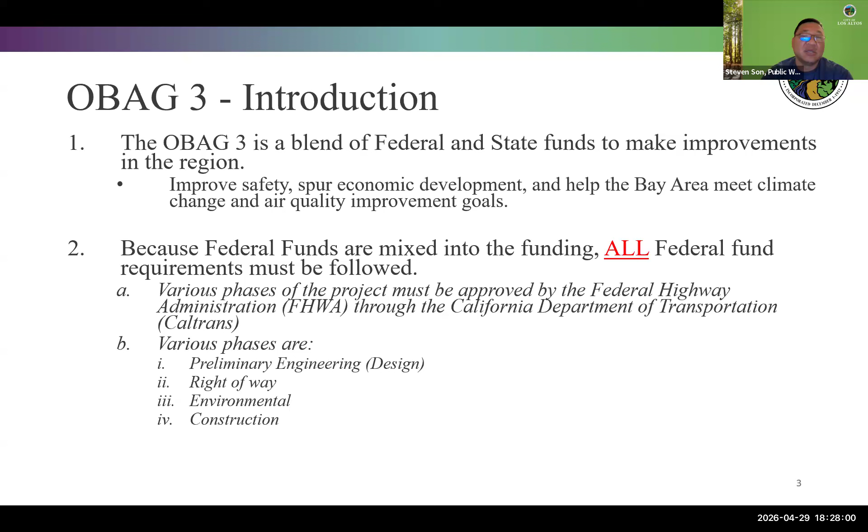After we have gone through this whole process, we're going to be applying for construction. So basically what we're saying is: federal government, we have a design, we have the necessary right of way, we don't see any environmental impacts, so allow us to go through construction.

So we have already received the design authorization to proceed with the design. I've been working with Caltrans to start working on the construction quality assurance plan, which is the QAP, and the QAC program, which is the quality control plan and the assurance plan and control.

Basically, what we do is reassure to the government that we're going to follow all federal requirements for procuring the necessary equipment. We're going to follow all the necessary rules when it comes to the Buy America Act. We're also going to follow the national AASHTO standard for all the testing method and how we procure the equipment.

So in this document, it clearly has to show how we're going to construct it, what standard we're going to follow, how we're going to test the equipment and the materials, and how we're going to ensure that the method we're using is top quality and follows industry standard.

Based on my deep analysis of what the grant application submitted, it appears that it was not exactly what everybody presumed it was going to be. In fact, it appears that there are some issues with how the grant application cost estimate was done, because there were a lot of critical things that were missed as part of the application itself.

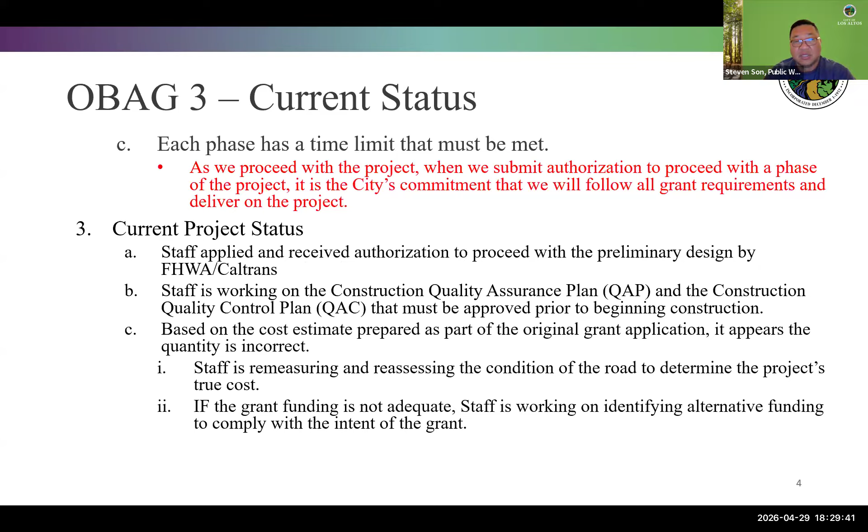Basically, this is the portion where it says we're going to follow all federal guidance. So we are mandated by the Code of Federal Regulation. These are all the do's and don'ts of how we are going to utilize these funds.

So just to give you a general scope of the project, this is an excerpt from the actual application that was submitted. The scope stated that the project will implement complete streets best practices, including protected bicycle ways, better integration between transit and bicycle, enhanced crosswalks, preservation of existing sidewalk, and narrow vehicle lanes.

I pointed out some of the key features that are going to have an impact, and I'll explain things. With respect to the enhanced crosswalk, we have already been doing this for some time now. I don't know if you guys have seen the RRFB installed along San Antonio. We have already been implementing various enhancements on the crosswalk, and we will continue to make those improvements, as well as putting in high visibility crosswalks as part of this project.

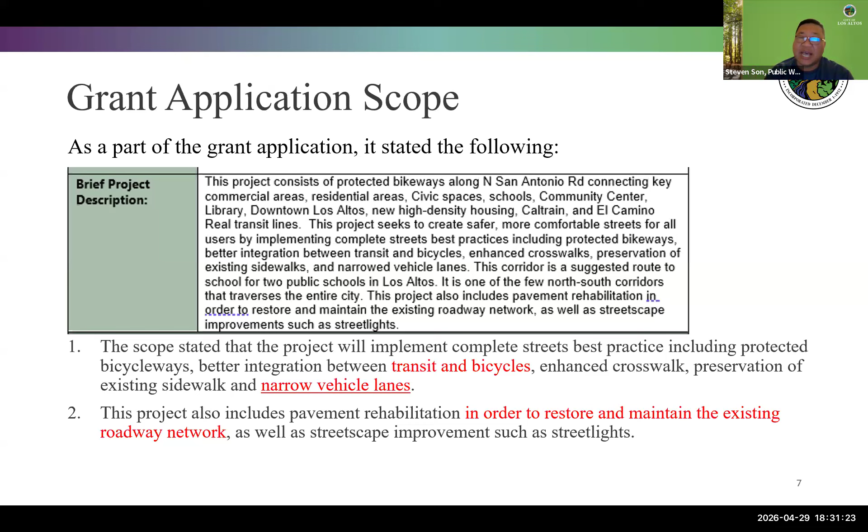It also states in the grant application that we are going to do a pavement rehabilitation to restore the existing road so that it would be a good network for us to make all the necessary improvements. We're also going to improve the streetscape and install streetlights. So this is what was actually submitted in the application. This is the scope of work, and this is where we need to try to meet.

I'm sharing with you the application scope and some of the categories of the grant application it fell under. We're stating that it is a Safe Routes to School infrastructure project, complete street improvements. We're going to mix in streetscape improvements, preserve our local road network, enhance safety, and improve our infrastructure within this area.

And in the narrative itself, we also said that this project rehabilitates pavement along the corridor, which is in need of repair. So we've already acknowledged that there is an issue with the road itself, and we're going to make necessary repairs as part of this grant.

One of the reasons why I'm bringing this issue up now is because it's going to have an impact on how we proceed with this project going forward.

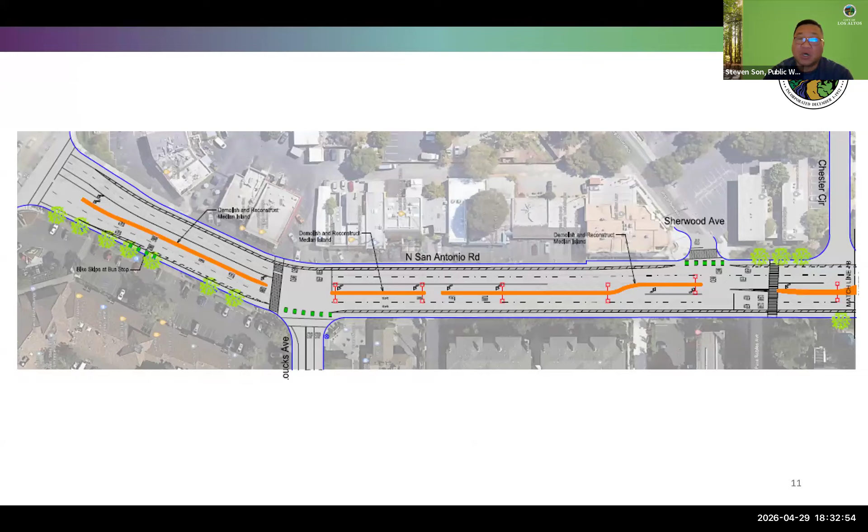The handout that I provided to you guys is the actual layout that has been submitted as part of the application. As you can tell, we're going to install what appears to be a bicycle lane with a 2-foot buffer. We're going to remove and replace the existing median, put in new striping, and add green marking for the bicycle lane. So these are some of the improvements being proposed as part of this grant application.

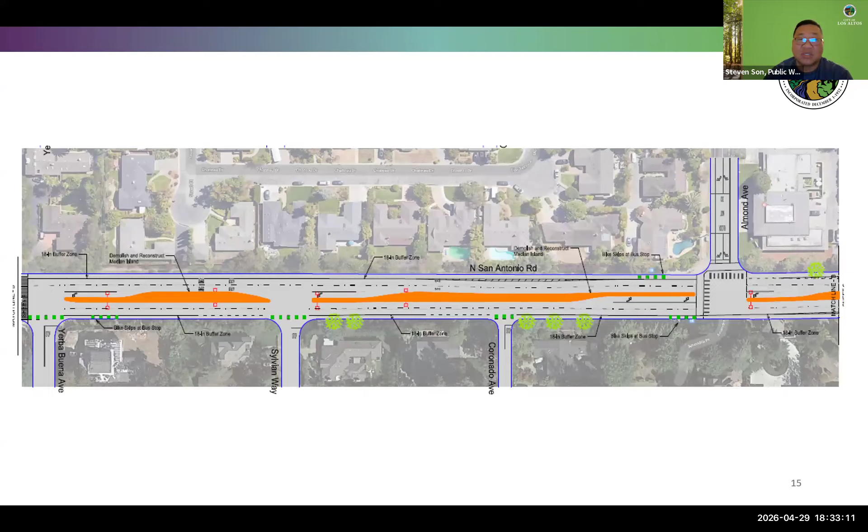We're also going to increase visibility by putting in enhanced crosswalks. So like I stated, we're going to put in the piano keys so that we're bringing more visibility into this project.

Now, one of the reasons why we're going—and this is kind of a critical section for us—is this: on the left is the grant application cost estimate that was done as part of the grant application. On the right was the cost estimate done in anticipation of possible rehabilitation of the road itself.

If you look on the left, you can see that we are proposing to make all the improvements shown on the plan, which is the remove and replace of the median, the striping, but it excludes all the rehabilitation required as part of this project. When this project was conceived, they did look at methods to rehab the road. They anticipated that they might just micro-resurface the road and dig out the existing asphalt section. That's the reason why on the right-hand side you see a significant cost increase of up to 12.79 million compared to the cost estimate on the left side, which excludes a lot of the rehabilitation.

That is part of what I already mentioned in our grant application that we're going to be doing. The other reason why this is very critical is it gives us a kind of roadmap—what was the thought process at that time, what was the staff thinking of doing to this road itself.

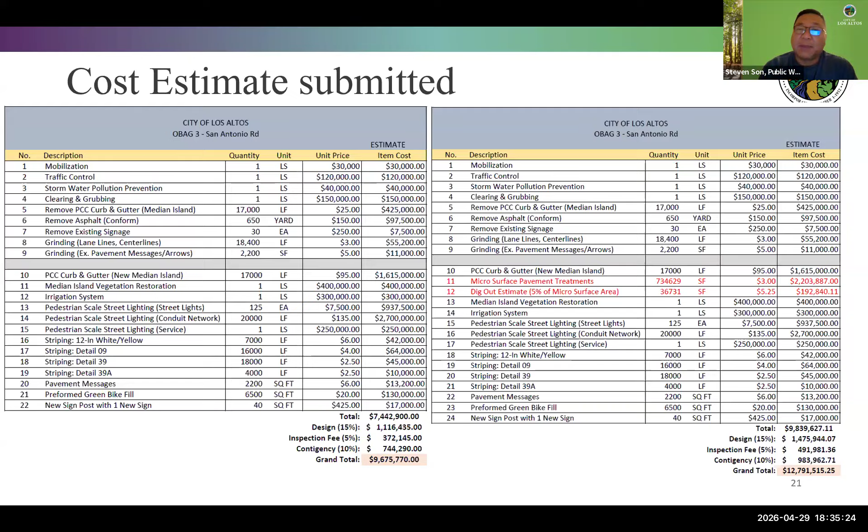So for us, I look at this and say, okay, I can glean the fact that we're going to remove and replace the median, remove and replace some of the asphalt—which is only 650 yards, not really that much—remove and replace signage, and grind out some of the travel lanes because we have to remove the existing striping. So it gives me a general idea of what the intent of the grant applicant was at that point in time.

Based on what was awarded from the MTC, there are some issues with what has been submitted. The cost estimate does not address the road rehabilitation. It was totally not included in the whole quantity estimate. Based on just spot checking some of the quantities shown, it doesn't seem correct.

There is no sidewalk repair that needs to be done along San Antonio. If you guys walk along San Antonio, we have a lot of really tall trees that have started lifting the sidewalk itself. And not to mention, it does not take into account any physical separators in the cost estimate. So it's kind of hard to tell exactly what the thought process was, but based on the drawing itself, it appears there was some sort of separation they were proposing to do, and I think it might have been striping.

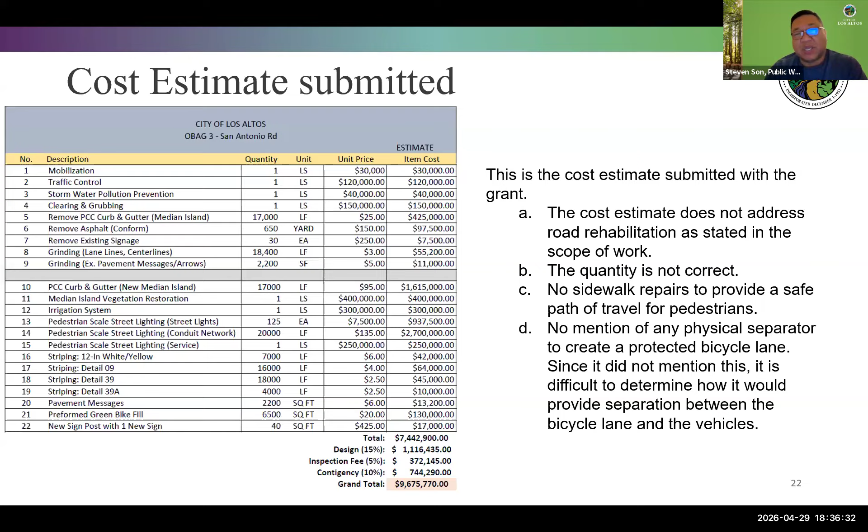As I've stated before, in our annual streets program, microsurfacing is basically applied when a road is weathered and has a PCI of around 70, where the structural integrity of the road itself is still in relatively good condition. We just want to preserve what we have and continue with preserving the road, doing some maintenance so we could prolong the life of the road.

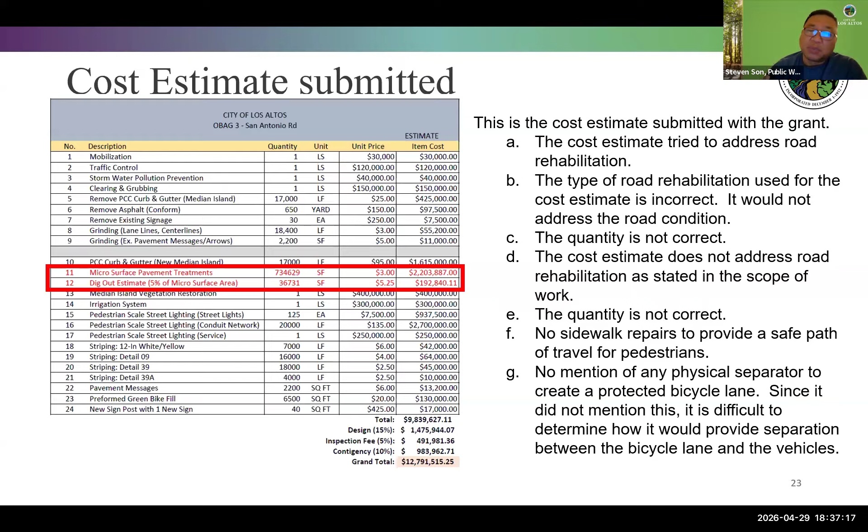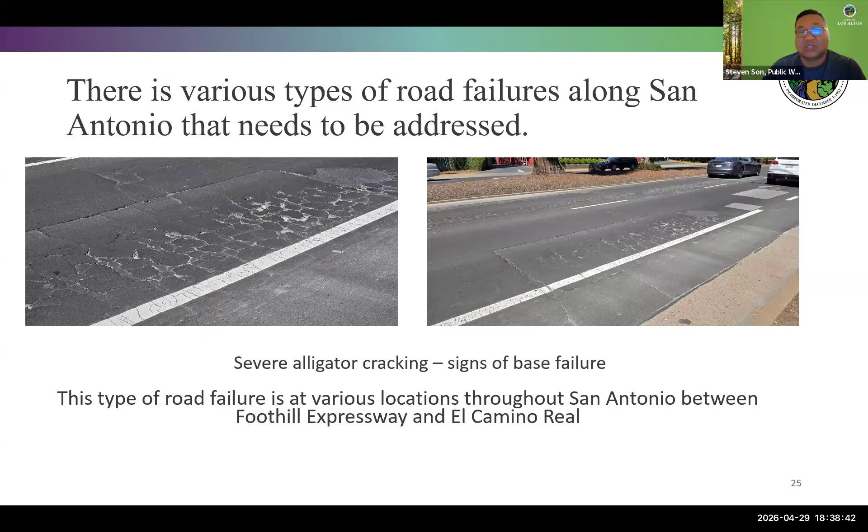You can kind of see the results of the old microsurfacing that was done on San Antonio. The discoloration you see right here is because the old microsurfacing has worn off, just from traffic. Microsurfacing is only good for about 7 to 10 years, and we have to reapply it, assuming we don't have cracking like you see here.

You're also in a situation where microsurfacing on this type of crack, even if we were to do a crack seal, is not going to allow this road to be prolonged for the life we really need to install these bike lanes. So unless we address this, when the road deteriorates even more, we would have to remove any improvements we make on this road to have this bike separation.

So this has to be addressed now, before we go ahead and apply the $9 million, to avoid having to spend another $9 million to put it back in.

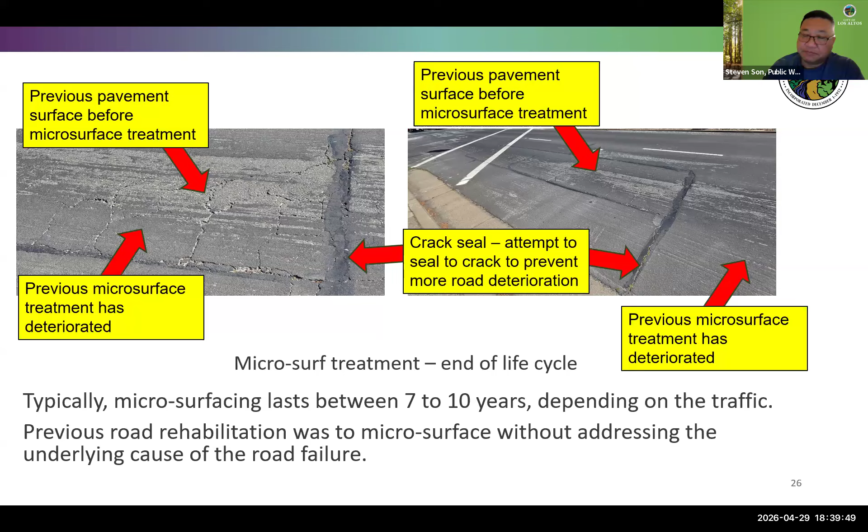San Antonio is also one of our heavier traffic loads roads. Because of that, we're starting to see rutting on the road itself. What is rutting? Basically, rutting is caused because of the speed of the vehicle - when the light changes, they start decelerating. The car is decelerating because of the friction between the tire and the road, and that stops the car. That friction also has an impact on the road itself, where it starts peeling back the asphalt so that you start having an indentation on the road.

You can kind of see that, typically with color variation like you see here. So this is where the wheel well is currently located at. You can kind of see it's starting to crack. As the road starts to rut, water's ponding on it, cars driving on it. As the cracks form, you're causing the road to flex more, water's getting in, and it's slowly causing the cracking to occur.

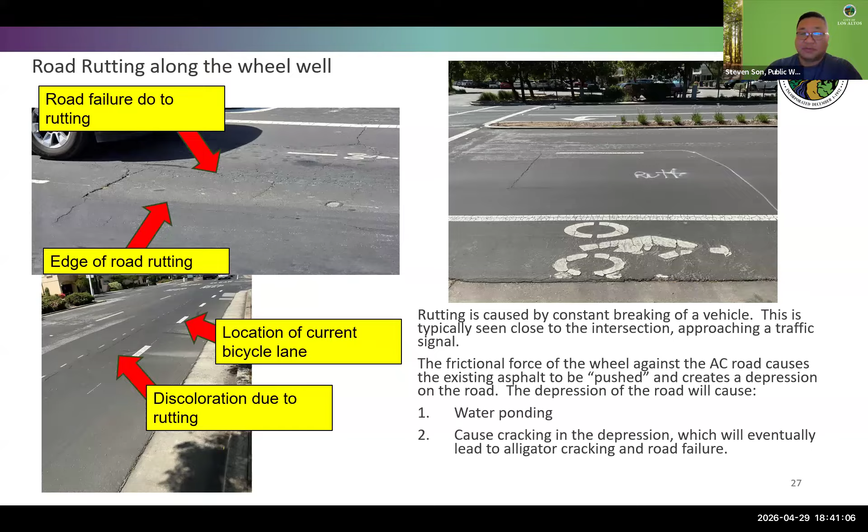Here are some of the other issues going on throughout San Antonio: through the years we have torn up this road for various utility installations. We've adjusted manholes, placed overlay, and you see trench patches where other utilities went ahead and installed their work. Every single time we do a trench patch, you're creating a weak spot where the old asphalt and the new asphalt meet that cannot be sealed. It's basically a hairline fracture that storm water will get into.

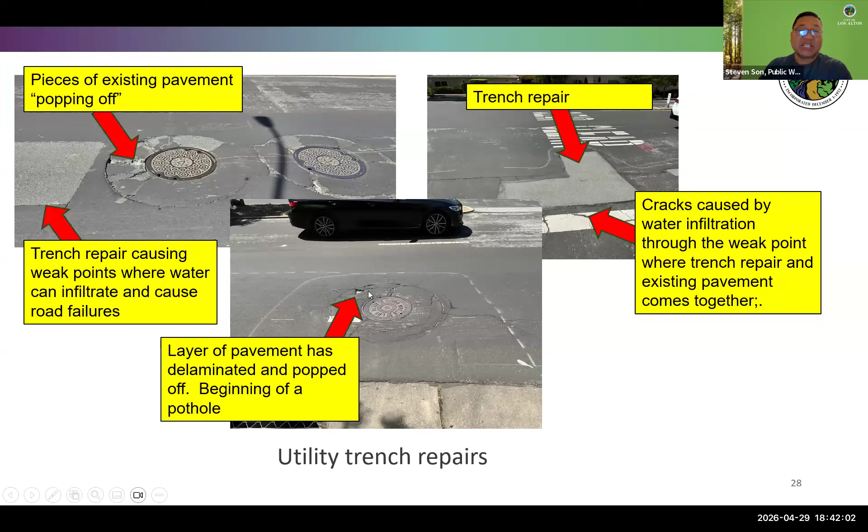And water is hydraulically very difficult to compress. So as water starts getting into those cracks, it propagates the cracks even more, to the point like these right here, where the asphalt is actually popping out - creating the beginning of a pothole.

The other issue along San Antonio is the fact that, like I stated before, the trees and vegetation are very mature in this area. So it's starting to lift the road as well as the sidewalk. This is now slowly becoming a tripping hazard that we've been trying to address by grinding out the lips so it's not a tripping hazard. But those are temporary fixes - we need to go through and really fix it.

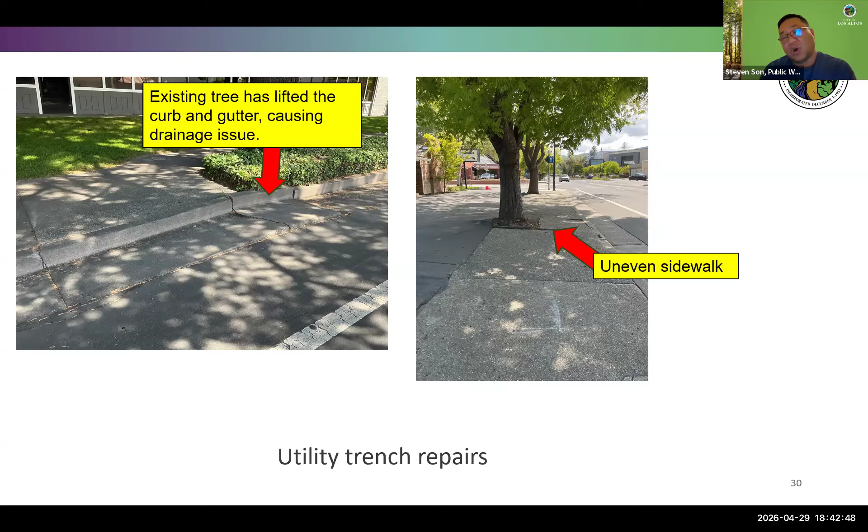Also, the tree roots are lifting the curb and gutter, causing drainage issues at various locations along San Antonio. These are locations where water is basically pooling, you're going to have debris build up, and it just has a cascading effect.

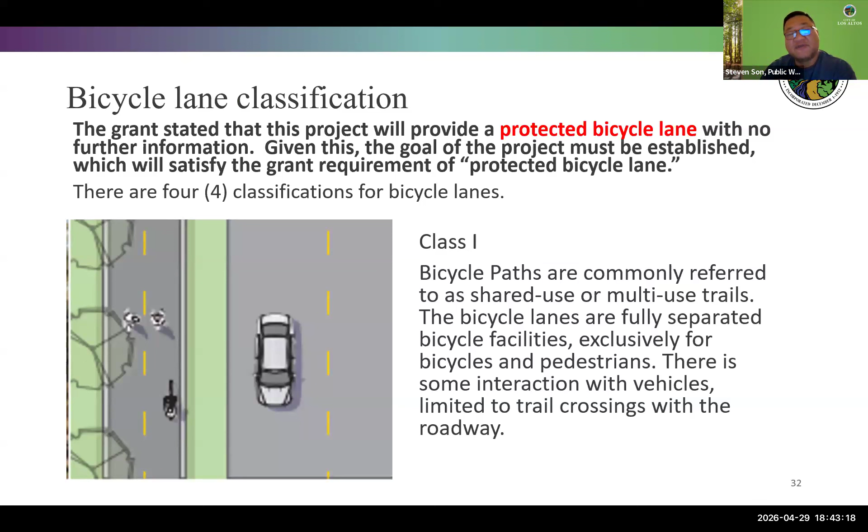Now I just want to briefly talk about the different classes of bicycle lanes identified in the Caltrans manuals. We have Class 1, which is basically a bicycle-pedestrian lane with total separation - both pedestrians and bicyclists use it, with a clear separation from vehicles. A Class 2 is what you would normally see throughout the city right now, where you have a bicycle lane designated into the travel lane with stripes, and we go ahead and show it with green paint, bicycle logos, and things like that.

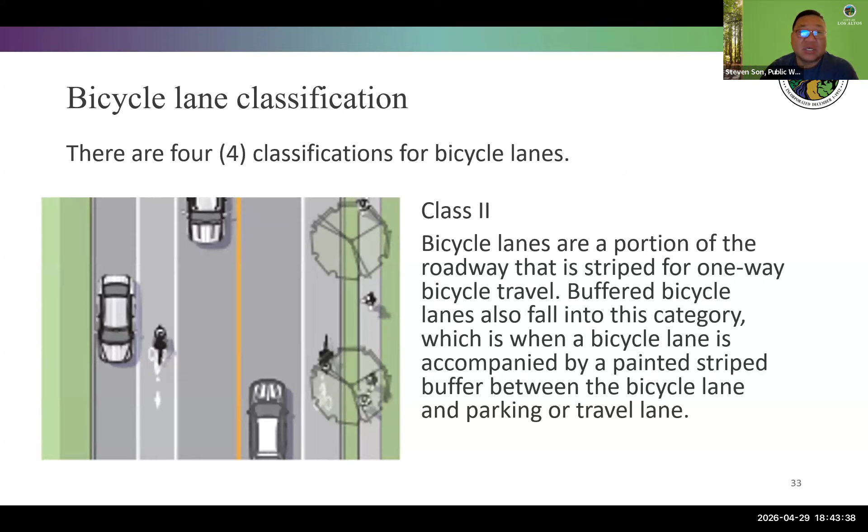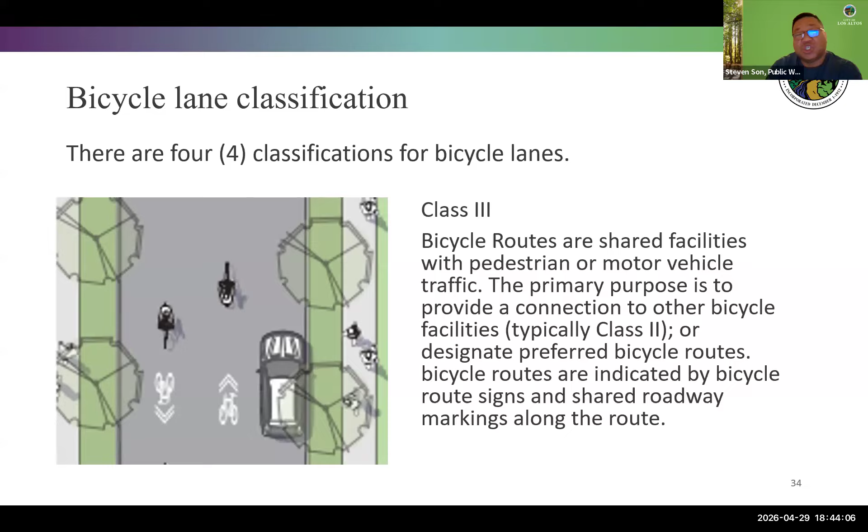There's a Class 3 - this is the one you would call a Sharrow. A classic example that pops out right now is on Portola Road, where right in front of the school you have a Sharrow. This usually allows you to connect a bicycle lane, so you're allowing a short section of road to be shared between cars and bicyclists.

Class 4 is what you would normally see with some sort of a 2-foot barrier that separates the bicyclist from the vehicle. Typically you do not see a pedestrian walking on this, but because we have no sidewalk in the city, you will see some pedestrians on it. This is basically a 2-foot buffer with some sort of barrier in between. You can see some of that along El Monte with the quick curb we just installed, so that it provides a level of protection for bicyclists - so that when they traverse through the area, a vehicle, even if they lose control, will not go through that barrier and hit a bicyclist.

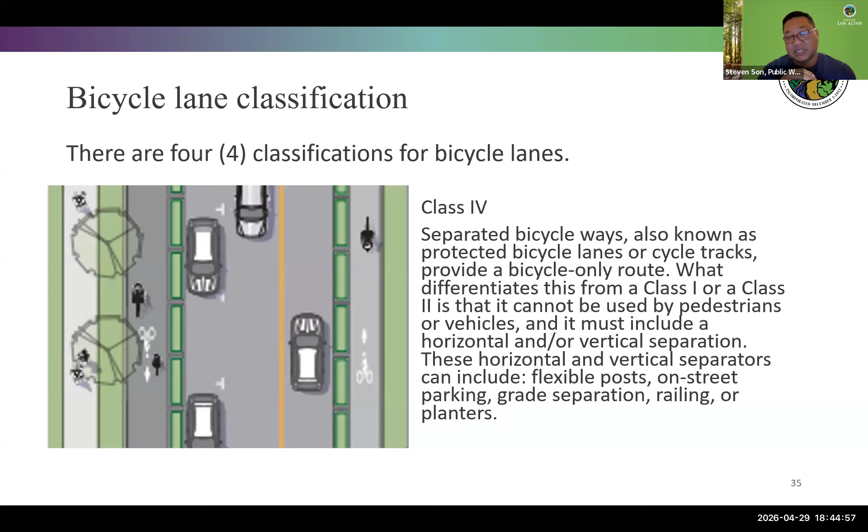Based on what I'm seeing right now on the plans, I could deduce that it is a Class 1 or Class 4, based on the striping where the bicycle lanes are and where they're putting in the green lines. So I'm assuming it's just Class 4. What are some of the challenges of implementing the grant? Class 1 would be very difficult for us to install because we would have to physically create a land barrier separation between the bicycle lane and the vehicle.

So we would possibly be having to move the sidewalk or do something creative to create that separation. Based on what I'm seeing right now on the drawing, I'm assuming it's a class 4 that was being proposed. A class 4 requires a 2-foot buffer with a quick curb or something like that that actually creates a physical barrier so that a vehicle cannot intrude into a bicycle lane.

The grant itself is saying that we're going to narrow the road. So the existing road is already 11 feet wide. San Antonio is a truck route. For us to reduce it down to 10.5 feet is not going to give us the added benefit to allow us to go ahead and put in the 2-foot bicycle lane.

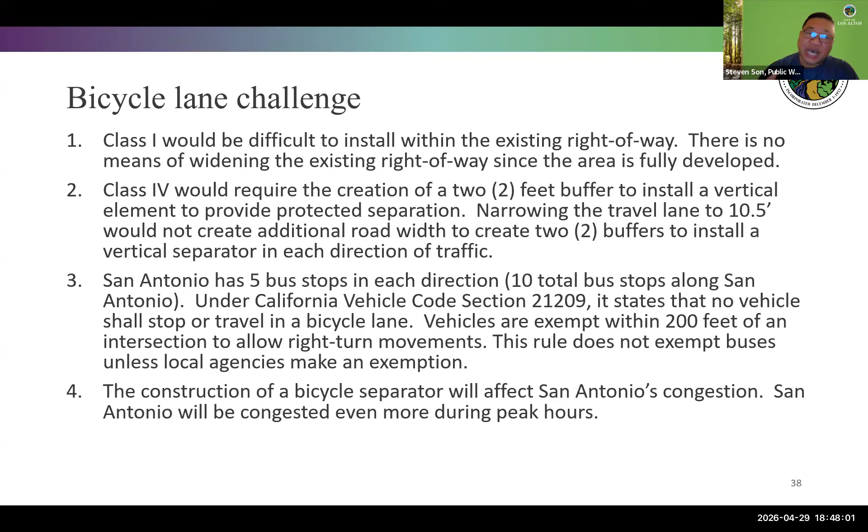I'm already trying to address that issue and the cause of those backups. So hopefully by summer we would make the modification so that it would resolve some of the backups that are going on.

The biggest challenge heading towards San Antonio is right around El Camino Real. The business itself is currently utilizing San Antonio as part of their parking lot. As you can see, we do have an edge line right here where we are basically allowing bicyclists to go ahead and utilize this space, between the parking lot itself and where the travel lane is. For us to go ahead and put a barrier here, we're basically taking away the business's ability to park any vehicles in front of their business.

So we technically can't do that because he has been there for a long period of time. I know I've been giving you guys a lot of negative information about this project, but there's some stuff you need to be aware of that has been going on. These are some of the challenges I've been trying to figure out how we could address, while at the same time delivering on this project.

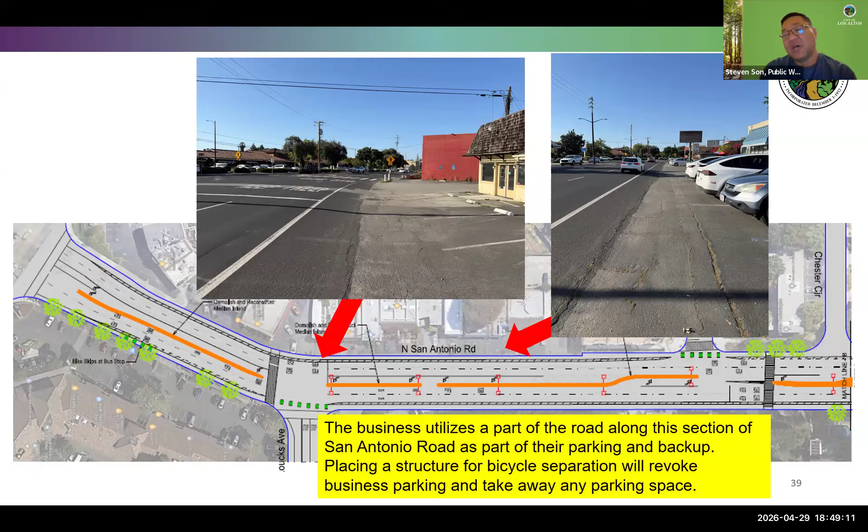This is aside from the fact that we are definitely going to have a funding shortfall on this project. So that is aside from that.

Going forward, despite some of the challenges of the grant application itself, we're still working through the process because we have already committed to the Federal Highway Administration that we are committed to delivering this project. I have already been reassuring MTC and VTA that we're going to go ahead and deliver this project no later than 2028.

It may adjust a little bit depending on how the construction goes and how the weather goes. But on a quarterly basis, I've been reporting to both agencies on where we're at, as well as Caltrans.

This improvement on San Antonio is going to be a very critical transformational feature of the downtown circulation—how the circulation is going to work, how the pedestrian is going to be able to go, how the bicyclist is going to be able to access the downtown area.

One of the things I need to talk about with the commissioner is what is it that you guys really want to see? What kind of bicycle lane would you like to see? I've given you the 4 different types of class bicycle lanes. I was also giving you the pros and cons. I'll be more than happy to go back to those items again in a bit.

We're currently working on the process of revising the cost estimate because we need to know what is the true cost of this project.

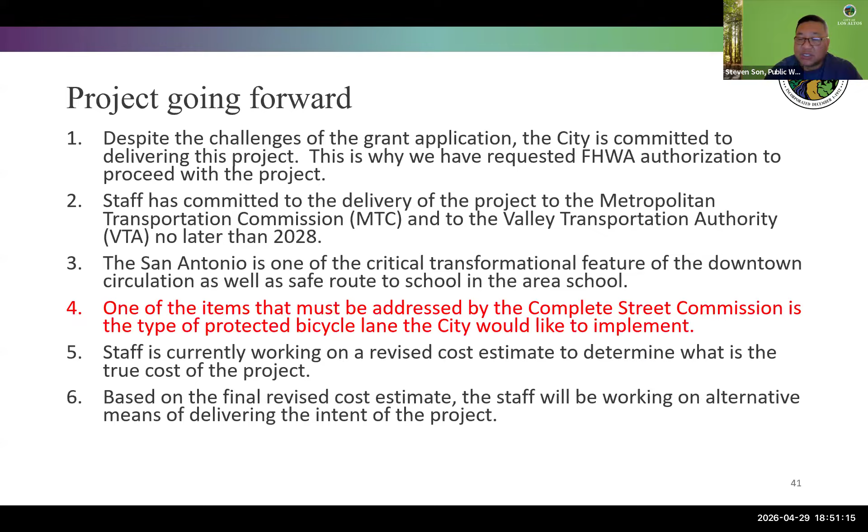This is our financial project commitment to Caltrans, and this is an authorization for us to go ahead and start doing the preliminary design phase. This is our assurance to Caltrans and to Federal Highway that we are going to deliver on the project.

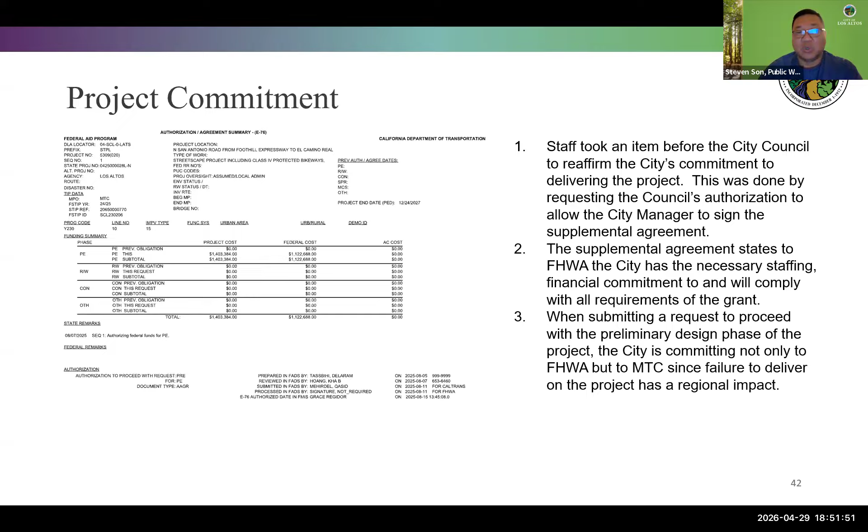We have also told them that we're putting some skin in this game by putting in 11.47 of our local match money so that we could obtain the 1.1 million from the federal government. So we're basically saying we're willing to fund it because this is that critical to us.

Staff is clearly aware and understand the priority of this project to the city. This is one of the biggest asks from the community itself.

Like I stated, we have already started going through the process of doing a cost estimate. We're trying to go through and look at what are some of the options on how we're going to deliver this project. Is it possible?

Is there a possibility of breaking this project so that we could try to control the actual costs? But at the same time, we have to make sure that we meet the intent of the original scope. That's part of the Code of Federal Regulation requirements.

I'm also going through and looking at various funding options that are available for this project. Is this something that we're going to have to use our city general fund, or is this something where I could use an alternative funding source to do this project?

So behind the scenes, we are going through looking at various options that we could try to apply for this.

I'm going to go over the schedule really quickly with you, and you guys all have a copy of it. Basically, I'm showing that we have already started the project with the understanding that by August of 2029, we're going to be totally constructed and close out this project.

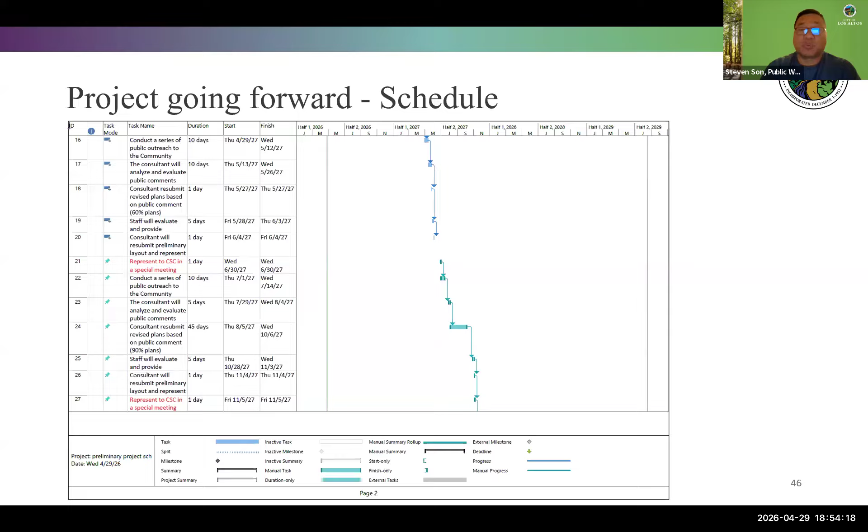So that is basically my presentation in a high level. I am open to any questions you guys may have.